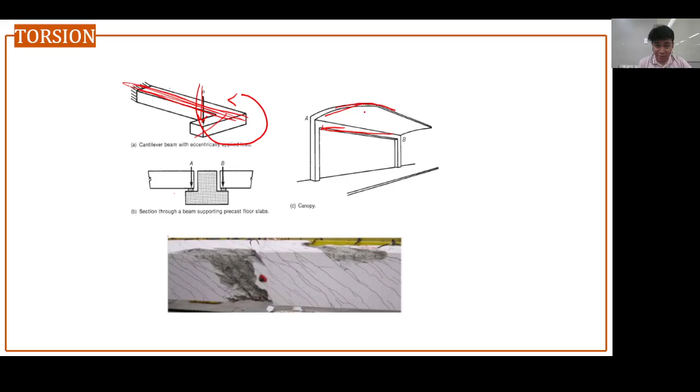Let's say we have here a waiting shed. We will experience a torsional movement due to this slab or roof. So due to that unbalanced load, it will contribute a torsional moment, or what we call torsion, about the longitudinal axis of the beam.

So once a beam is subjected to torsion, there will be long diagonal cracks that may happen on a certain structure.

Aside from that, we also have here a beam. Let's say you put here a load, but those loads are unbalanced, not equal. So this force will induce a counterclockwise moment about the longitudinal axis of the beam, and this force will also induce a moment, but clockwise.

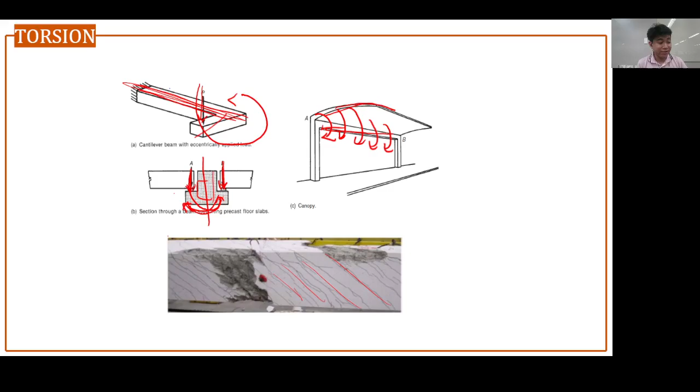Now, if those moments are unbalanced, let's say you have a counterclockwise moment of 100, and the clockwise moment is only 80, then you have an unbalanced moment of 20. That 20 kilonewton-meter will produce a moment about the longitudinal axis of your beam, so it will twist.

As the beam twists, there will be diagonal cracks that may happen if we don't provide any torsion reinforcement. So our goal here is to solve for that torsional reinforcement.

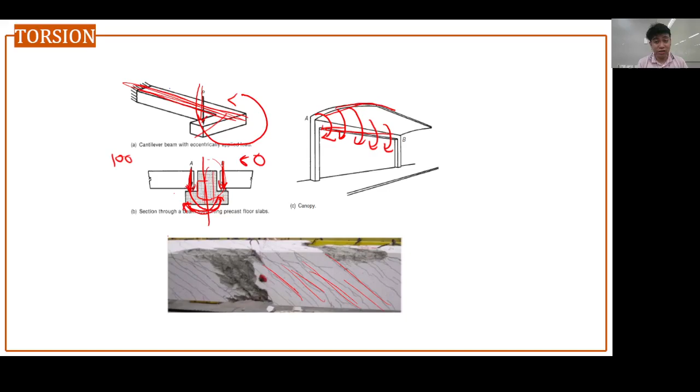Okay, so before we start, if a member is subjected to torsion, the torsional moment causes shearing stresses, same as shear forces. Shear forces cause shear, and torsion also causes shear stresses. So later on, this will be added as reinforcement to our previous design of shear reinforcement.

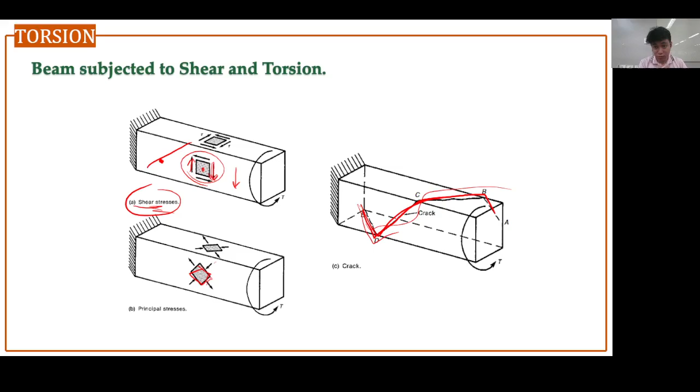So once you combine that, it will produce cracks that look like this. So for torsion, the cracks behave like this. Therefore, we have to provide some reinforcement to counteract the possible cause of those cracks.

Okay, so now how do we design torsion reinforcement? First, we have to understand the threshold torsion, which is the capacity of the concrete to resist torsion. Now, if the actual factored torsion is less than the threshold torsion, meaning the capacity of the concrete, then we don't have to provide torsion reinforcement. This threshold is the equivalent of Vc in shear.

For solid cross-section, the formula is 1 over 12, lambda square root ng FC prime, ACP squared over PCP. Later on, we will discuss the ACP and PCP, but hindi naman discuss lang, we solve problems. We'll try to identify how to solve ACP and PCP.

The ACP is enclosed by the perimeter of the concrete, so that's just the area of the gross concrete. PCP is the perimeter. So let's just focus on non-pre-stress members.

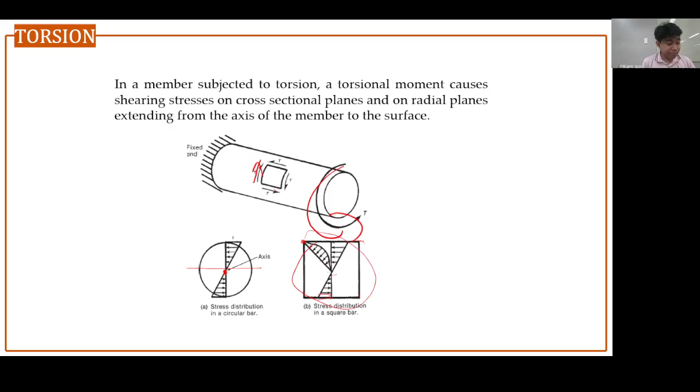Threshold, no? Before you consider, okay, sabi dito, threshold shall be in accordance with this formula, and that formula is our basis whether we design for torsion o hindi, no? Or not, no? So for the beam cast monolithically with the floor slab...

Okay, the overhang flange width is to be included in the calculation of ACP. Remember, ACP is the area of the beam, PCP is its perimeter. However, if we cast the slab and the beam monolithically, sabay silang binuhusan, there will be an adjacent width of the overhang that should be counted in calculating ACP and PCP.

Okay, kapag naka-monolithic yung slab, no? Now, for torsional moment from the slabs, unless determined by more exact analysis, it shall be permitted to take torsional loading from the slab as uniformly distributed along the member. Kasi class, as we analyze a beam na may monolithic slab, and that the slab is not equal on both sides of your beam...

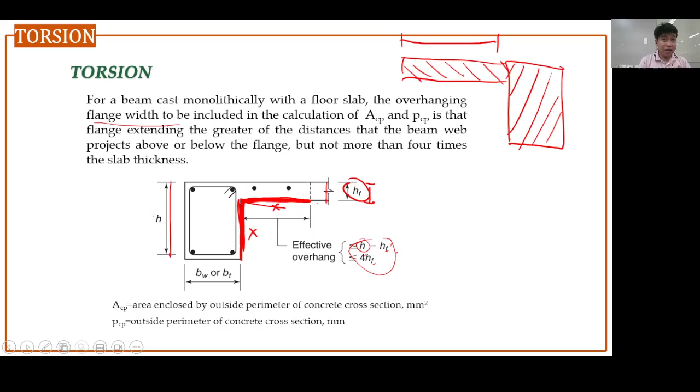Halimbawa, no, dito wala namang slab sa kabila, dito may slab. So there will be a torsional moment acting on your beam kasi sa isang side lang yung slab. Okay, now we consider a uniform torsion due to that slab. So anyway, we'll try to solve a problem regarding that mamaya, no?

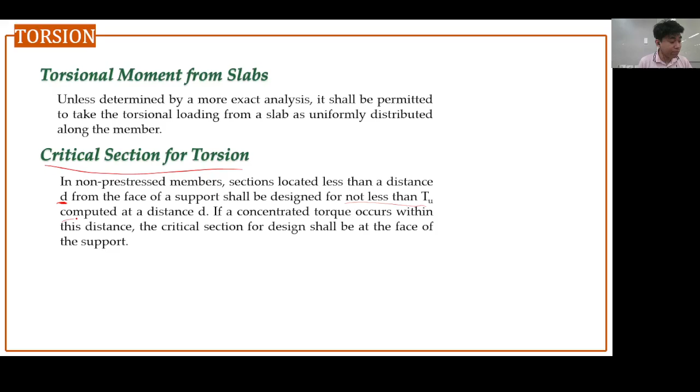For the critical section for torsion, in non-prestressed member, the section located less than the distance D from the face of the support, just like the shear, no? At the distance D, nandoon daw yung critical distance, it shall be designed not less than the TU computed at the distance D.

So we should design that distance, okay, the critical TU, no, at the distance D. If a concentrated torque occurs within the distance, critical torsion for design shall be at the face of the support, just like the shear reinforcement, no? Pag may concentrated force or shear doon sa point na yun at the distance d, you have to take the factored shear at the support.

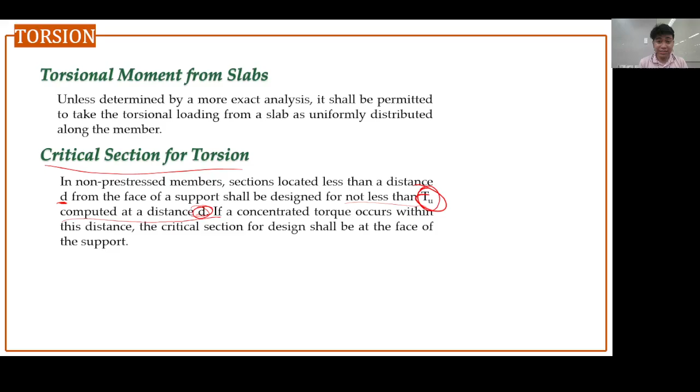Pero but in this case, no, at the distance d, kung uniform lang naman yung torsion, parang shear lang siya guys. So therefore, ang gagamitin natin reduction factor dito ay also 0.75. Okay? For torsion, same with shear, 0.75, kasi additional, no, additional shear reinforcement ang magiging torsion reinforcement.

So anyway, for the torsional moment or for the calculation of the section, as per code, to reduce unsightly cracking and prevent crushing of the surface, the size of the section must be limited as follows. Dapat class, tama yung cross-section natin, tama yung pagkakagawa ng cross-section if this value is less than dito. So ibig sabihin, no cracks will occur, or cracks will be prevented.

This value for the class should be less than this. So that's how we check the cross-section. Going back to our shear, the VU must be less than or equal to our shortcut, which is 5 phi VC.

That's how we check if the section is adequate. Now for torsion, this is our checking if the section is adequate, for solid section and this one for hollow. What's new here, class, is TU is the applied torsion force factor shear, okay BWD. We have AOH and PH here. So how do we solve for AOH and PH?

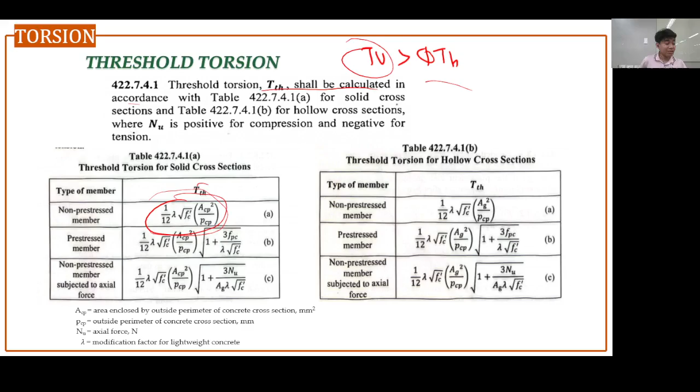Now let's say the threshold is very low. This is the threshold. If your TU is very large compared to the threshold, it should be multiplied, no? Say the torsion force, the torsional moment, is very high compared to the threshold. Anyway, these are in kilonewton-meter since torsion is a moment. Let's say the applied torsion is very large compared with the threshold, and you already check the cross section. This applies here, guys.

So therefore, that's the case where you have to design already. So how do we design reinforcement in terms of torsion? To design the nominal torsion, the nominal torsional strength must be equal to 2AOATFYTS cotangent theta. Let's talk about theta here.

As per code, it shall be permitted to take theta equal to 45 degrees. Actually there are two, A and B, but we'll just consider 45 degrees. So that cotangent theta, cotangent 45, or 1/tangent 45, that is equal to 1. Tangent 45 is 1. So therefore, let's just focus on this formula.

Once we design the factored, the TU must be less than or equal to phi Tn, the nominal torsional strength. So if you're given a TU, just equate it to phi Tn. Our goal here is the spacing, so let's just solve for the spacing.

Spacing of the torsion reinforcement, it's like a stirrup. It's still stirrups, guys, but it's an additional spacing for the stirrups. So let's understand the variables here.

We have Tn. If this is design, class, it comes from TU, the reduction factor, and then solve for Tn. So that is just TU over the reduction factor of 0.75, that is your Tn. AO, as per code, is just equal to 0.85 of AOH. Recall, what is AOH?

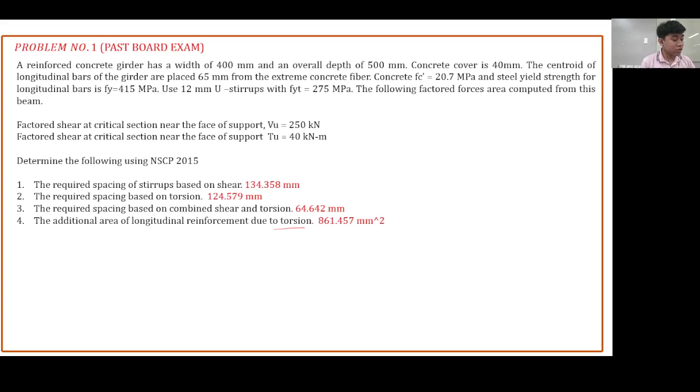So VU and TU were computed. Okay, so the first question, determine the required spacing based on shear lang dito. Okay, the next question, based on torsion. Okay, and then the next question, i-combine natin yung shear and torsion. Okay, and then the additional longitudinal reinforcement due to the torsion. Ito yung AL, additional longitudinal reinforcement.

Okay, so ito yung class. We have 500 na total depth. Okay, and then the given, then the BW. And then the effective depth, we already calculate that. Kasi we have the D prime, 500 minus 65, that is 435. We do not know kung ilang layer yan, basta sinabi ko nasa yung centroid nila, no? Nasa 65 mm daw.

So 435 ang effective depth. So these are the given values, the factored shear, factored torsion, and FY, FYT, FC prime. Concrete cover is 40, no? Tama ba? Yeah, concrete cover is 40. We need that later.

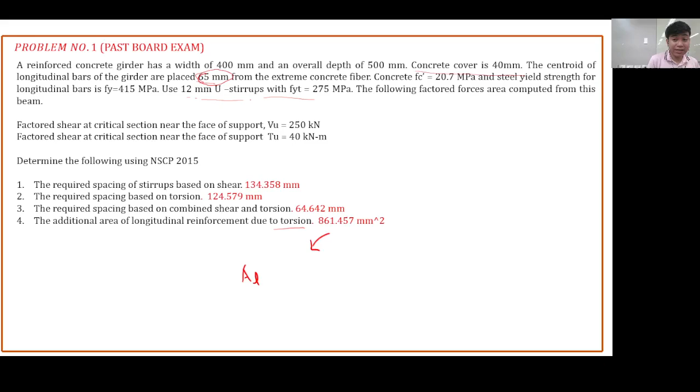First is, the question kasi is the design, the spacing of the stirrups based on the shear only. Okay, so of course we solve the shear strength of the concrete muna. Okay, the formula is 1/6 lambda square root of FC prime BWD. Kasi baka mamaya hindi naman natin kailangan i-design yung spacing. We just need to use minimum spacing, or maximum spacing pala, no?

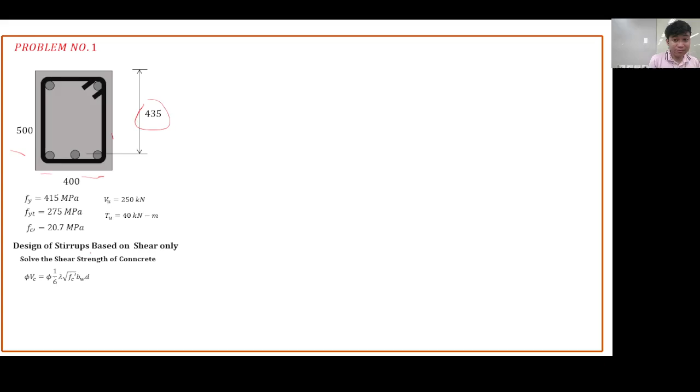So, phi natin, 0.75, 1/6, lambda is 1, square root ng FC prime, BWD, in kilonewtons, that is 98.957. Okay, then bago ka mag-design, of course i-design mo yan plus, i-design mo yung shear reinforcement dahil yung VU natin na given is greater than the phi VC. So you have to design the spacing. Check if the section is adequate. So for us to identify if the section is adequate, you compare the VU doon sa 5 phi VC.

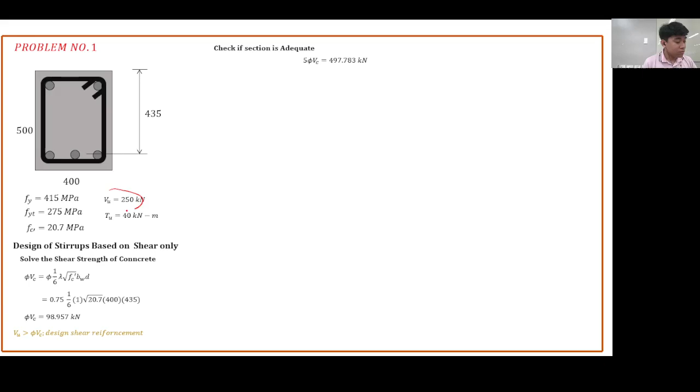So the derivation for this was discussed in our shear reinforcement. Why did it become 5 phi VC? You compare that with VU. So far, VU is less than the 5 phi VC. Therefore, you don't have to increase the beam dimension.

Okay, so for board exam purposes, you may exclude or skip this on your calculation because the section is always adequate there. Okay, and this is actually a past board exam problem.

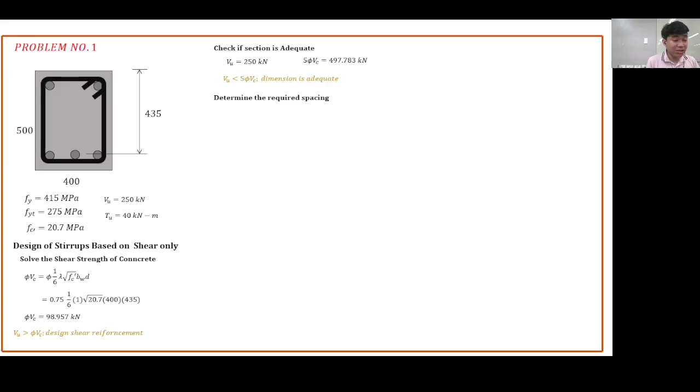Determine the required spacing. So for the required spacing, we have to compute first the VS. VU minus phi VC, then divide by the reduction factor of 0.75. So your answer here is 201.

So now you calculate the spacing. Your AV is the two legs. FYTD over VS, VS should be in newtons. So two legs, 12 square, 12 is the diameter of our stirrups here. So FYTD over the VS, compute for S.

But you have to compare that with the maximum spacing. So the maximum spacing depends on the comparison of VU to 3 phi VC. Again, that is based on the comparison of VS to 1/3 of square root of FC prime BWD.

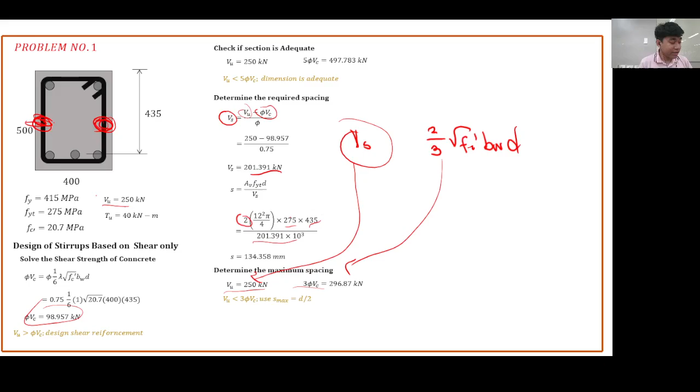You compare that. So the shortcut is this: compare VU to 3 VVC. Now, as you can see, 3 VVC is 296 and VU is 250. Therefore, VU is less than 3 VVC. If VU is less than 3 VVC, use D over 2. If greater, use D over 4.

So dito we use D over 2 lang, which gives 217.5 millimeter. So which of them will govern, between the two, class? Obviously, the smaller value should be selected as our governing spacing due to shear. Okay, you already know this concept, solving the spacing due to shear with a given factored force.

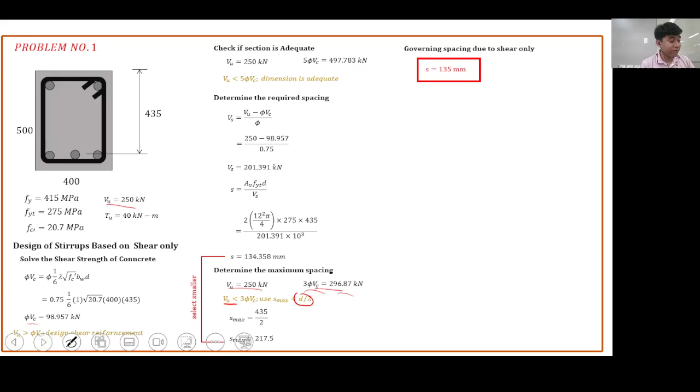Now let's proceed to the factored torsion. So here are the step by step in calculating the spacing due to the torsion only. First, the first thing to do is to solve the threshold torsion. Maybe you won't even need to solve the spacing due to torsion if the capacity is too large, similar to VVC.

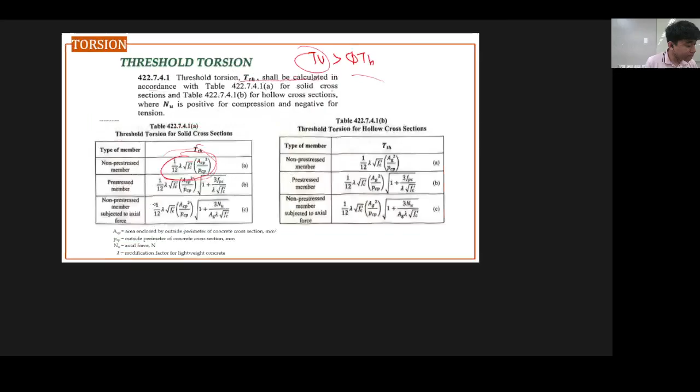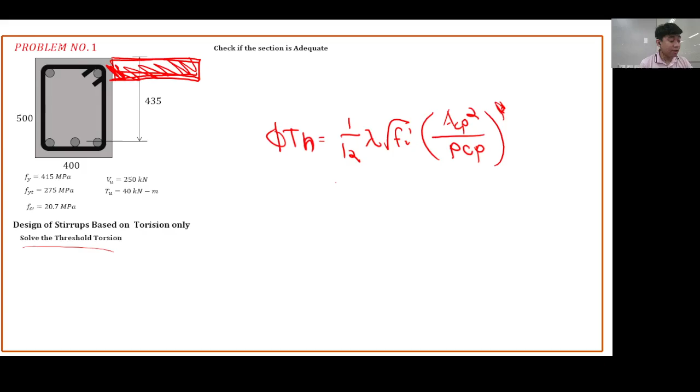So what we need here are the ACP and PCP. What is ACP? Just the area of the beam, unless otherwise stated as including the flange. Since it's not stated here, class, that there's a monolithic slab, we don't add area for part of the slab. Since there's no slab part here, guys, you don't have to consider that. Just consider this rectangular area of concrete. So for the ACP, just get the area of that 400 by 500, which is 200,000.

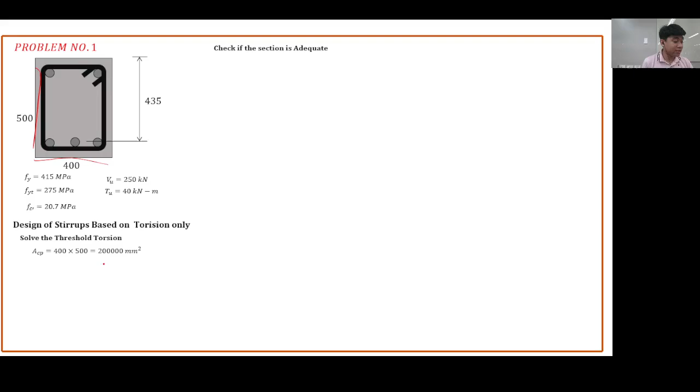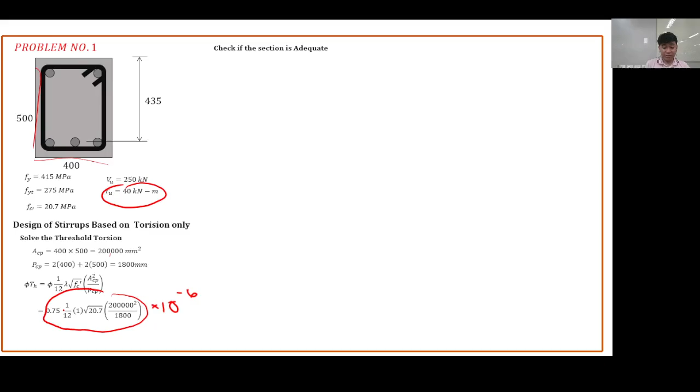Next, get the perimeter for the PCP. So now you may use the formula for the threshold torsion. Reduction factor is 0.75, 1 over 12 times square root of FC prime. Take note, class, your answer here is in newton-mm. So to compare it with the given factored torsion in kilonewton-meter, you multiply this by 10 raised to negative 6, so your answer becomes kilonewton-meter. The answer here is 6.319 kilonewton-meter.

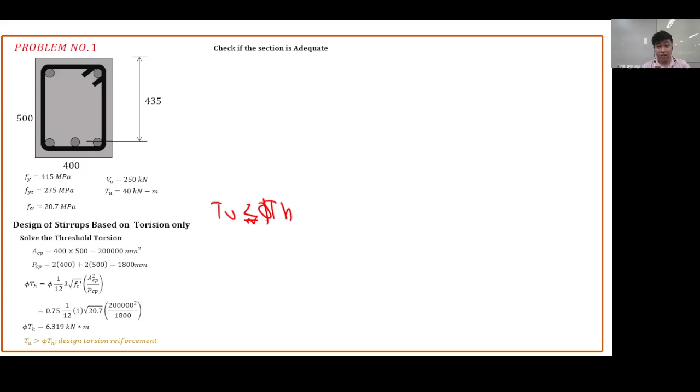So if we compare the factored torsion to the threshold torsion, we can clearly see it's much larger, similar to comparing VU to VVC. When VU is large, you design the shear reinforcement. Likewise, when TU is large versus the threshold, you design the torsion reinforcement. But if it's small compared to the threshold with the reduction factor, no need to design the spacing — you don't solve for S, and there's no maximum spacing to set. You would neglect torsion reinforcement. But since it is large here, we have to solve the torsion reinforcement.

Okay, so we have to check first if the section is adequate by comparing the formula. Before you proceed with the design, you must check first if the section is adequate.

This one, the formula that's long, class. We have to compare the left side of the equation to the right side. The result should be either less than or equal to. There are many variables, many inputs here, class. We need the given Tu, we have the Vu. We need the Vc, the nominal.

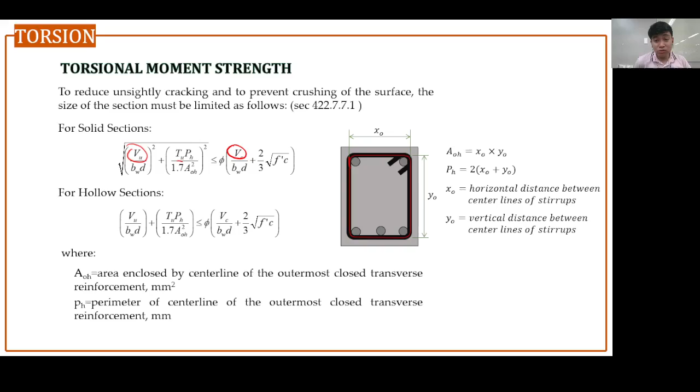All of this should be in Newton, millimeter units - substitute our units in these terms. Okay, let's try to solve. This is a bit long, guys, to check if the section is adequate. But you may skip this if you are solving board exam problems or doing the final exam - you don't have to check whether your section is adequate or not, because it's already adequate when we're asked to solve for spacing.

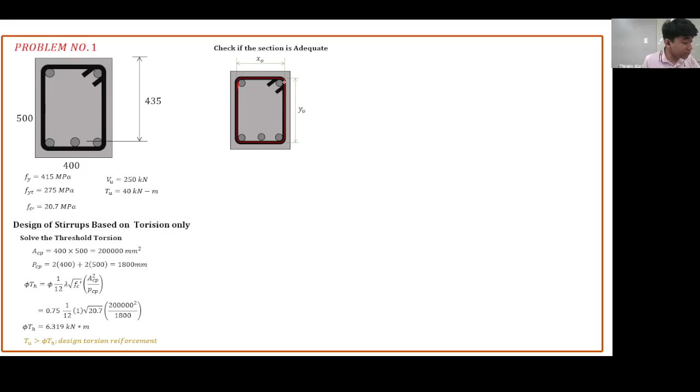Since we need the AOH and PH in the formula for checking the section, make sure to solve first the XO and YO. XO is the center to center distance of the stirrups.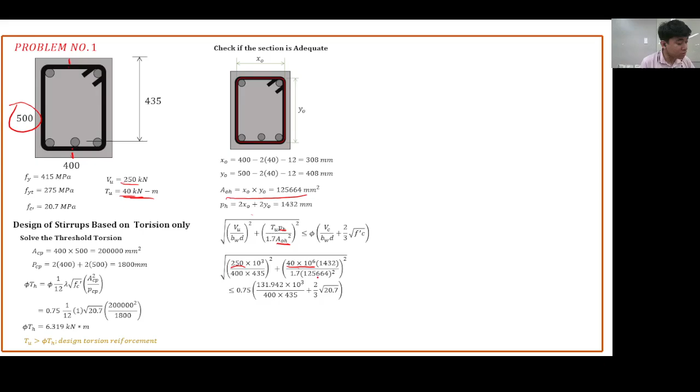So 1432 over 1.7, AOH - where is it? Here, 125, this is squared and there's another square here. Then this value, you compare it to this.

Our phi is 0.75. Our Vc is the nominal shear strength of concrete - this is Vc, 1 over 6. So 1 over 6 lambda, no reduction factor since it's just Vc. 1 over 6 lambda square root of fc prime, 20.7 times BWD times BW.

So BW is 400 times D which is 435.

So this is in Newtons, guys, since here I put kilonewtons, I multiply by 10 raised to 3 again to convert to Newtons, over BWD plus 2/3 of the square root of fc prime.

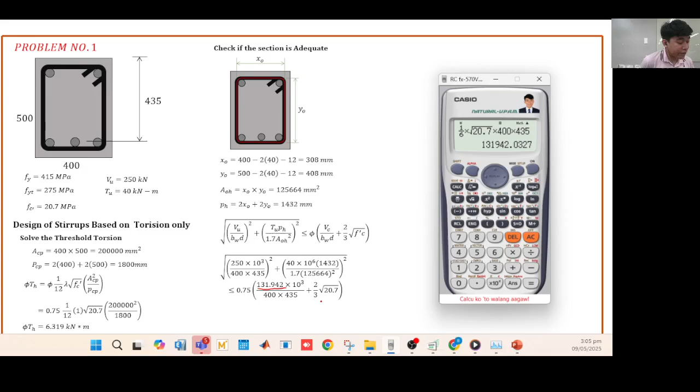Solve the left-hand side and right-hand side of the equation - it should satisfy this condition. So far, the left side is smaller than the right side, so therefore the section is adequate.

Okay, so next, determine the required spacing. Now let's solve for spacing, class, since the section is adequate, we need to design the torsion reinforcement - we can now solve for spacing.

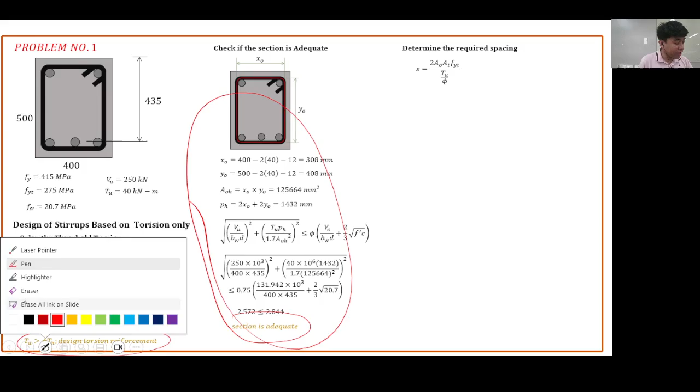This formula came from Tn equals 2AO AT FYT over S, with cotangent theta here. Again, this is already 1. Then you just resolve for S. And Tn, that is just equal to your Tu over the reduction factor.

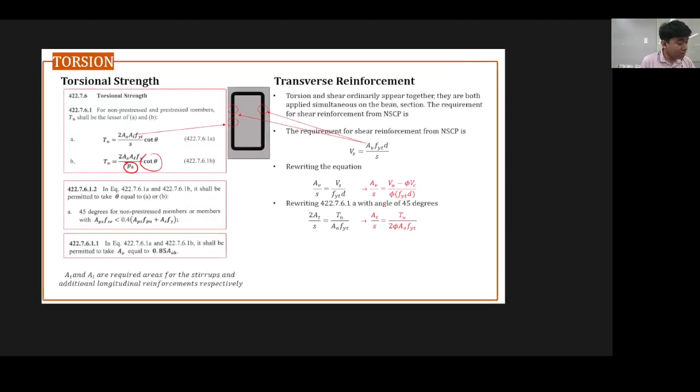That's why we put this here since this is just Tn. Again, this is from this formula - that's how it goes there. So just solve the spacing.

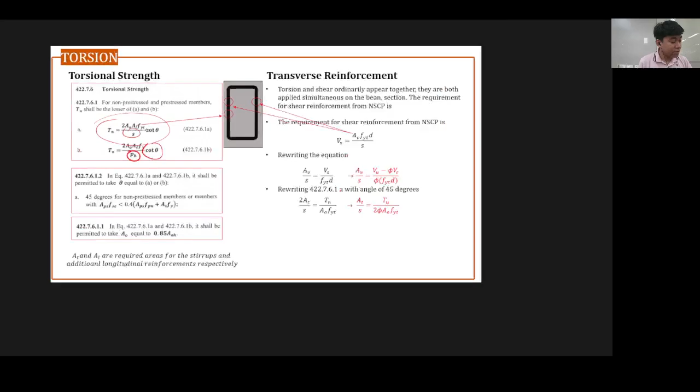This is the spacing we're looking for, the required spacing for torsion. Okay, AO - what is AO? That is 0.85 of AOH. This is written in the NSCP - 0.85 of AOH.

Let's substitute. Anyway, 80, no? Para siyang AV, pero isang area lang lagi, no? Ng leg. Area ng isang leg lang lagi yan, class. FYT over TN.

So you convert this to Newton mm, ha? Kasi naka-kilonewton meter to, guys. Convert that to Newton mm kasi we are using NSCP formula. Okay, so solving for S will give us 124.579

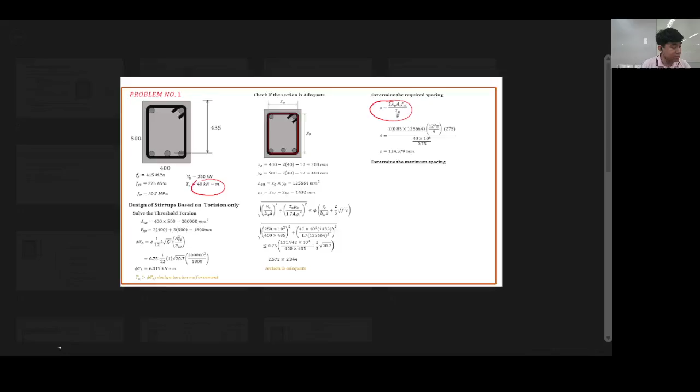millimeters. So that is the spacing, but we have to compare that with the maximum spacing, as per code, the maximum spacing allowed by the code. So let's check this. So pag na-solve mo na yung spacing, guys, the maximum spacing for torsion reinforcement,

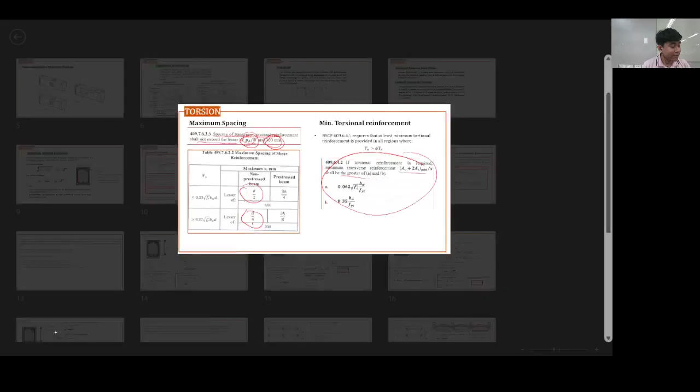hindi ko ata nalagay dito. Ito pala. So, this maximum spacing for torsion reinforcement shall not exceed the lesser of. So, pili ka lang ng mas maliit dyan sa PH over 8 and then the 300 millimeters. Okay? So, for the maximum spacing, PH over 8 and then the 300.

Okay, so for overall, just select dito. Since pipili ka na mas maliit dito as your maximum spacing, then afterwards, pipiliin mo rin naman kung sino mas maliit dyan. So, for overall, just select kung sino yung smallest dito. So, that will be the governing spacing due to the torsion only.

Okay, but how about the combined torsion and shear? Actually, that's the reality, no? The torsion is always combined with the shear. So, hindi naman pwedeng magkaiba yung spacing mo dyan.

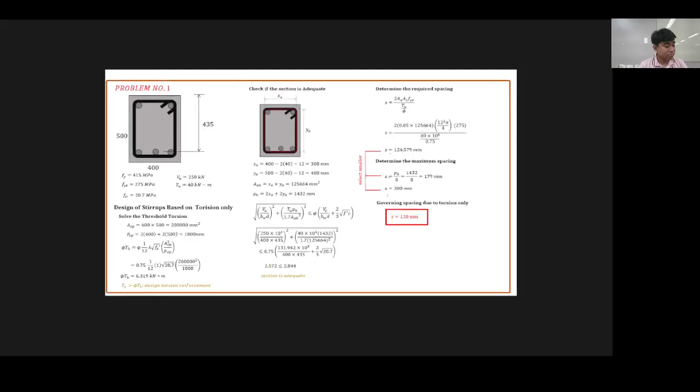Diba? Ito yung spacing mo sa shear. Ito naman yung spacing sa torsion. 120 isa 135. Hindi naman sila pinagaan, kasi lalong lalaki yung spacing. Hindi siya safe. Hindi rin siya minus guys.

So, how do we solve the combined shear and torsion? Okay, so for the combined shear and torsion, we need the AV over S from the shear. AV over S from the shear. So remember the formula in computing the spacing.

You solve that value. Okay? Then, therefore, you have the VS, FYT, D. Okay, so ito yung VS natin kanina. Nag-solve na tayo ng VS, di ba?

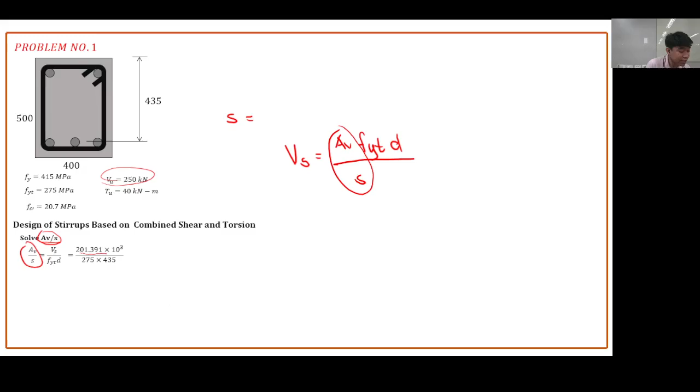Doon sa first question, due to the shear only. So ito yung VS due to the shear force na yan. And then divide by FYTD. So, ito yung sagot dyan, class. So, meaning that is the area of the shear reinforcement, two legs, no? Per spacing. Okay? Area, ito yung kailangan mong area per every spacing.

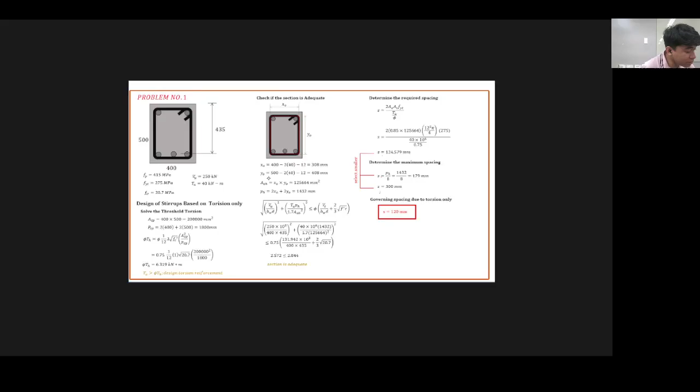Okay? So, next, solve At over S. So, yung At over S natin, so anyway, meron palang yung formula natin. May 2 dito. Okay. Sa pagkuha ng spacing due to the torsion.

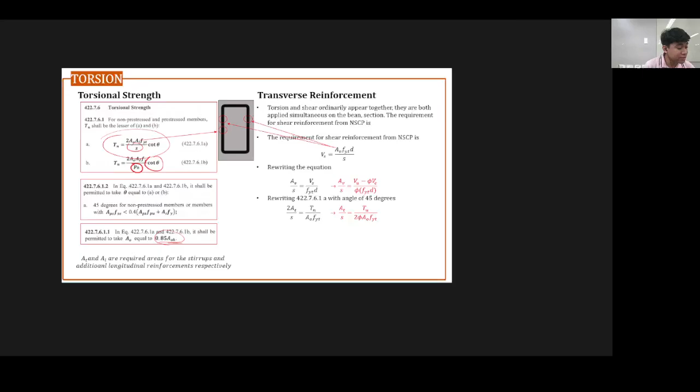So, ano ba yung ina-account ng 2 na yan? Bakit may 2 dyan sa ating formula? Diba kasi nga, ito, one leg lang ang kinoconsider. Okay. Ang At is considering one leg. That's why, naglagay pa dito ng times 2 just to account the other legs.

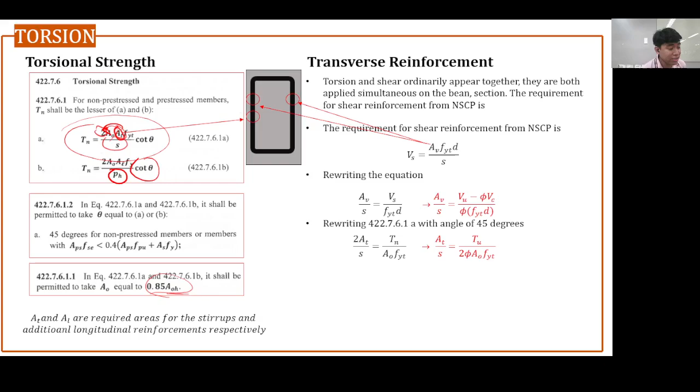Okay? So, wala siya dito pero nandito siya, class. So, technically, parang dalawa din talaga yung legs na ginamit for calculating the torsional strength. Okay, so, solve lang natin yung At over S.

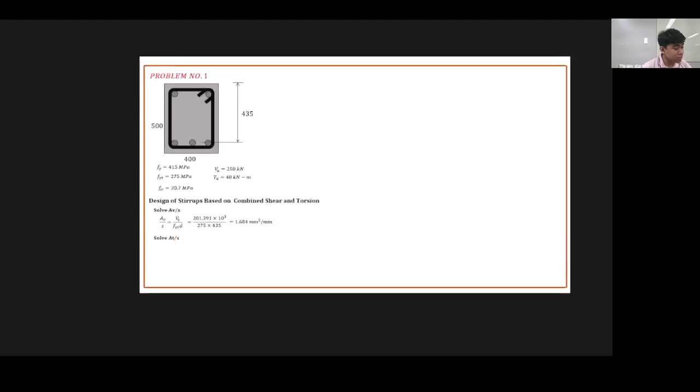We're done with the AV over S. Now, let's solve the At over S. Saan siya galing? Doon sa Tn is equal to, yung formula natin, 2 AO At okay, times FYT over S. So, kailangan mo is At over S.

Okay, At over S. So, magiging, ano siya, Tn over 2AO FYT, At over S. Okay, pero Tn, ang given kasi natin is Tu. Ang ginawa natin, Tu divided by the reduction factor, Tn, guys. So, this is from the formula na NSCP.

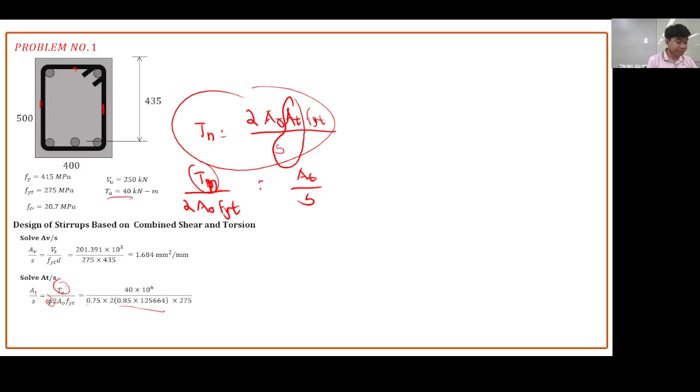No? Tn, para maging T, kasi given natin Tu, divide lang na reduction factor, that is Tn. So, you substitute this, you have the Tu, reduction factor 2 AO, ha? AO is 0.85 ng AOH. AOH is the center to center ng stirrup area. Okay? So, that's the answer.

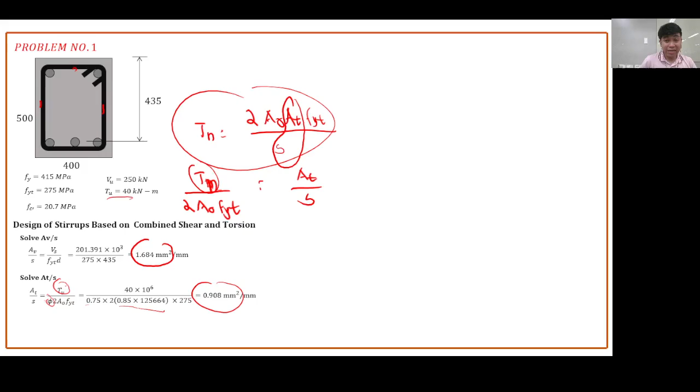So, ang gagawin natin dito, class, i-combine lang natin yung required area, no? Required area of the stirrups due to the shear and due to the torsion per millimeters. I-add lang natin sila, guys. Okay?

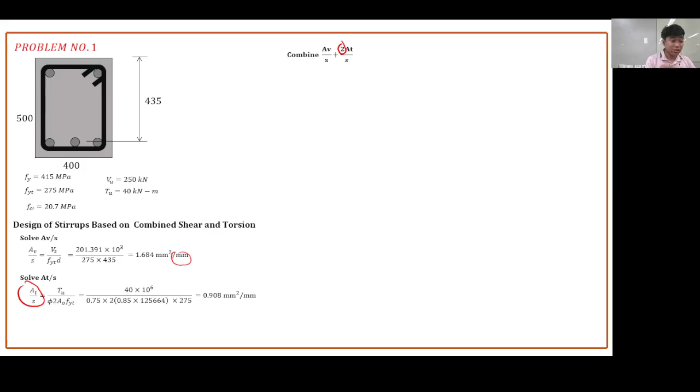However, may times 2 po ito. Kasi nga, one leg lang yung At over S. So, di mo kasi makukumpara. Kasi per spacing, area of the legs or the hoops, di ba dapat yung mga hoops naman, dalawa, yung minimum of 2 yun, di ba? 2 yung legs natin per spacing. So therefore, so yun, we multiply 2 here, 2 dito kasi one leg nga lang kinonsider dyan. Balik lang natin yung 2. Pag-add natin, that's how we combine the reinforcement due to the shear and torsion.

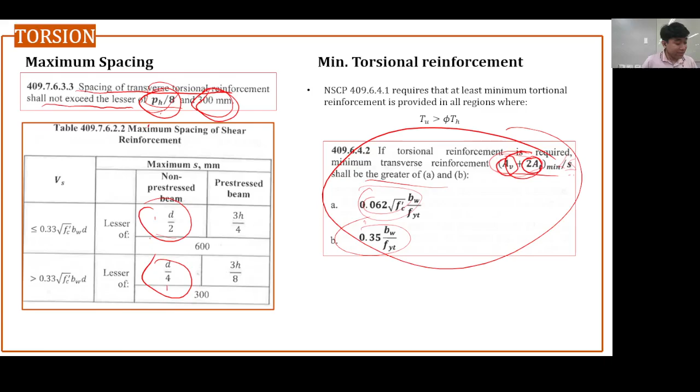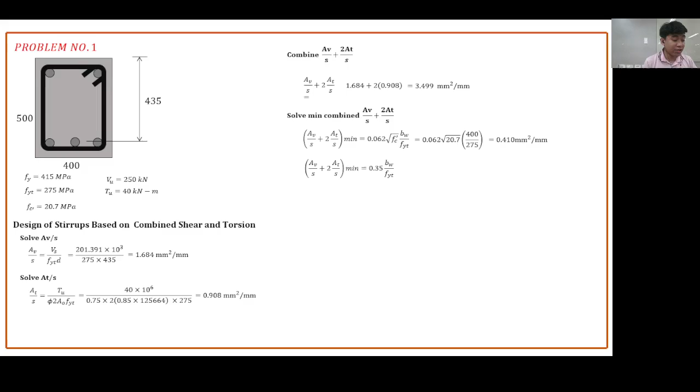So again, the formula: 0.062. This becomes our minimum per spacing. So, substitute: 0.062 times square root of FC prime, BW over FYT. This is the area of the hoops, combined, due to combined shear and torsion. The other formula is 0.35 BW over FYT.

Code says we just pick whichever becomes our minimum value - the larger one. Then after that, just select whichever is higher. Overall, the safest area here, class, per spacing, per millimeter, is actually the highest among the three. Just select the largest among these three values, and that will be the combined area of the stirrups per spacing.

Our goal, class, is the combined spacing now. So how do we solve that? The governing area for stirrups or hoops - let's just call them hoops, guys - area of hoops per spacing is 3.499 square millimeter per millimeter. So what we do, class, is solve the spacing. Solve the required spacing. So what happens there, class - solving the spacing, area of hoops over 3, just resolve the S. What's the area of the hoops?

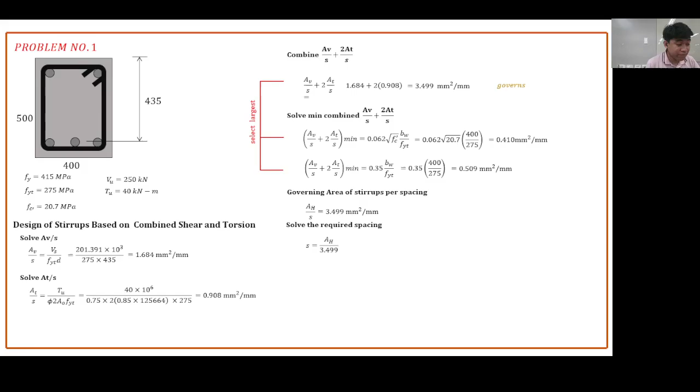How do you get that? If you have 2 legs, just get the area of those hoops - 2 legs, that's the area. So just substitute - this is your AH - two 12mm squared, pi over 4. With that, you can now solve the spacing.

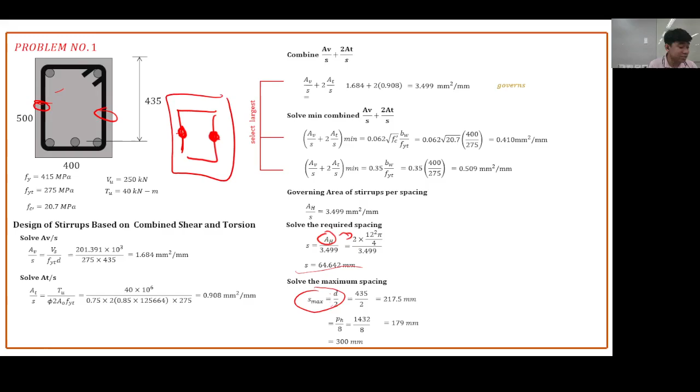But we have to compare that to the maximum spacing. Anyway, the maximum spacing for the combined shear and torsion is just the combined maximum spacing between shear and torsion. Our maximum spacing due to shear only is d over 2. Due to torsion only, PH over 8, and then 300. You just combine the maximum spacings of shear and torsion.

So for the overall spacing, combined shear and torsion, just select the smallest among those 4. That will be the governing spacing due to the combined shear and torsion. So that's the question, guys, in the board exam - that's how it's done.

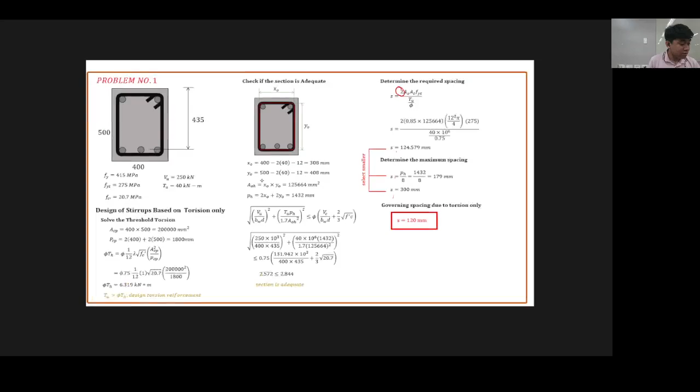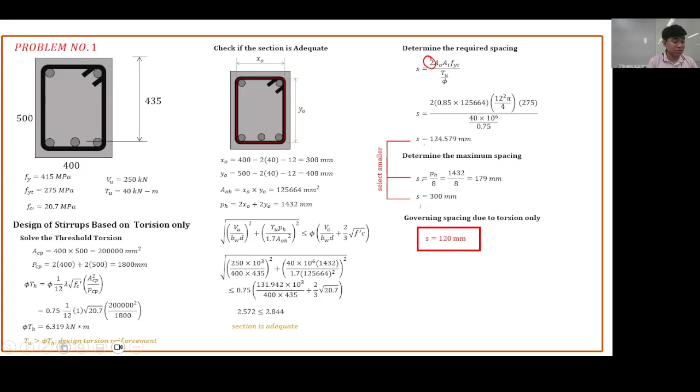Actually, you may skip this portion - computing the cross section - even on our final exam. This is how we solve it, getting the answer to that question: you determine the spacing due to shear, due to torsion only, then combine it. So you may skip this part for final exams or questions with choices, since you don't need to increase the beam dimension. Otherwise, you're really designing the cross-section - you identify the cross-section, or you're really designing the structure.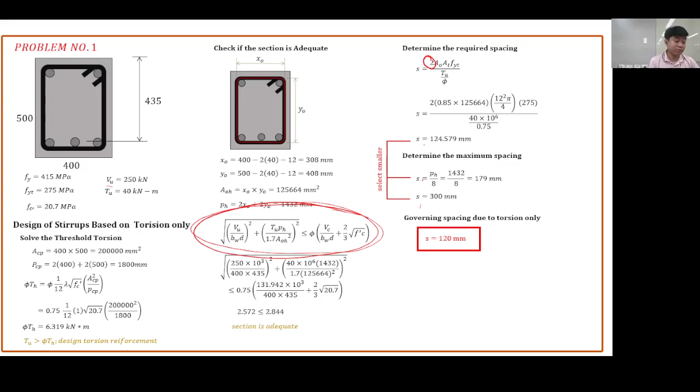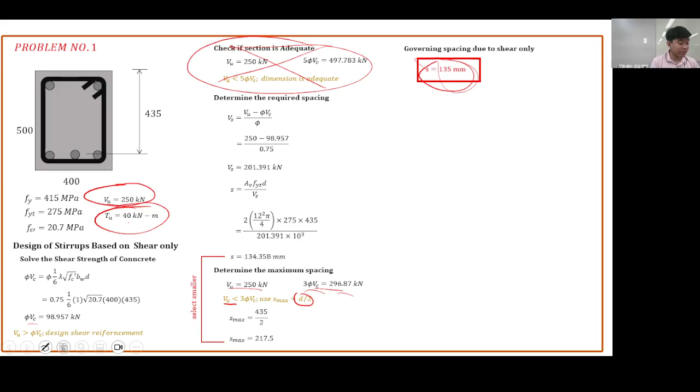For example, in our next problem, we're trying to identify if the cross-section will fit properly - is the cross-section properly designed. But for board exam questions, you don't have to check that, you can skip it. Skip that long formula. For shear only, what do we skip there? This - checking if the section is adequate. Okay, so that's how we design the combined shear and torsion. So, next problem.